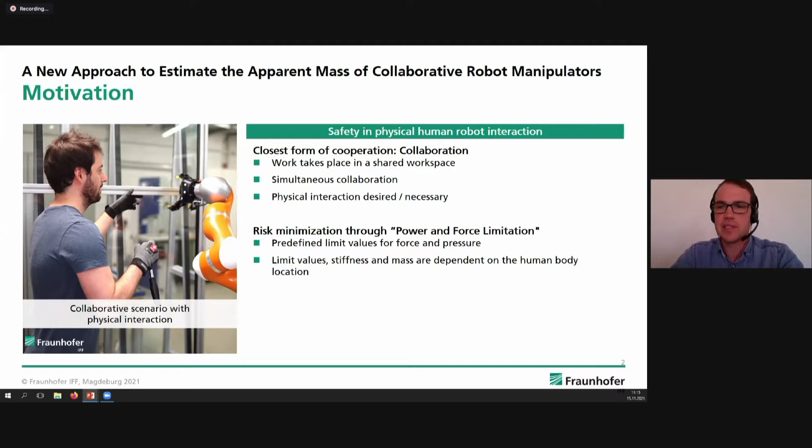That's why robots working in this mode must be run in the power and force limitation mode. In this mode, there are predefined limit values for force and pressure for each body part of the human. As a result, today you have to do experimental validation with a biofidelic measurement device at the end of your installation of the robotic system, and this device emulates the stiffness behavior of the human soft tissue.

But what does this mean? So if you want to set up a robotic collaborative work cell, you will start with your virtual design tool. There you will define a default velocity, calculate your cycle time and everything based on that. And next, you will go into installation.

And in the installation, you do tests. And those collision measurement tests often reveal that the velocities you had in your virtual design tool don't meet those biofidelic limit values. So you have to go back in iterations, and this is very time consuming and cost intensive before you can go into usual operation.

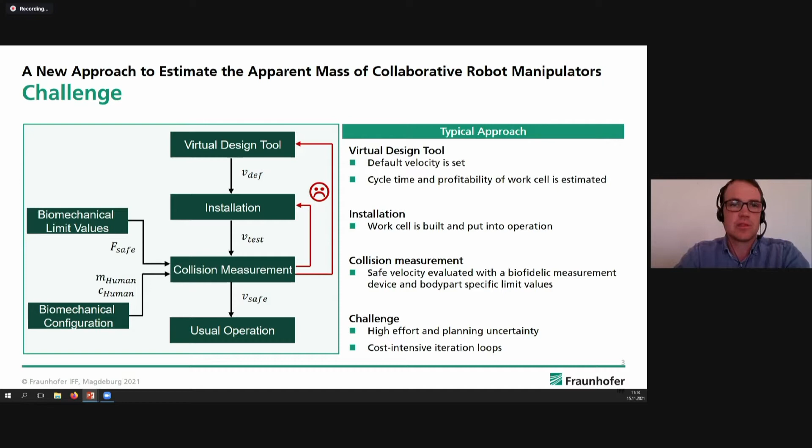So the big challenge is that those loops, you usually don't want. That's why we say, okay, the best way would be if you could already calculate somehow a safe velocity inside your virtual design tool. Because like this, you can go directly into installation of the robotic work cell with your safe velocity, and finally go to usual operation, skipping this time-consuming experimental validation.

And the question we had on this topic was: is the apparent mass suited to predict the safe velocity, and how must this apparent mass be calculated?

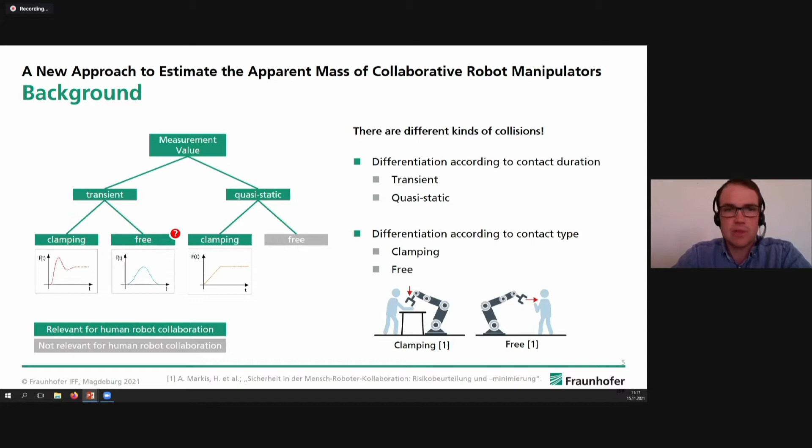To understand what kind of collisions exist, we have to look at a little bit of background. There are different kinds of collisions: we have to differ between the time constraint, so it could be transient, meaning a short collision, or quasi-static, meaning long term, and we have to differ between clamping and free collision. The work I'm going to present today focuses on free transient collisions.

In literature, we find different models to calculate the impact force. The most simple model says that the mass of the robot collides with the mass of the human. In between is a spring, and we can reduce the system to the one on the right, where we only have one impact mass fixed to a rigid body via a spring, and we can calculate the impact force, or also the velocity if the maximum impact force is given.

So the question is: you have a multi-body system of a robot. How can you somehow project this to one directional point mass with the same velocity as the impact point?

To understand a little bit more, we have to look at how collaborative robots are usually built up, because they have elastic components in their drivetrain, mainly the torque sensor and the harmonic drive gear unit. As an effect, this elasticity decouples the drive and link inertia, so our single robot mass is at the end not one mass, but two masses.

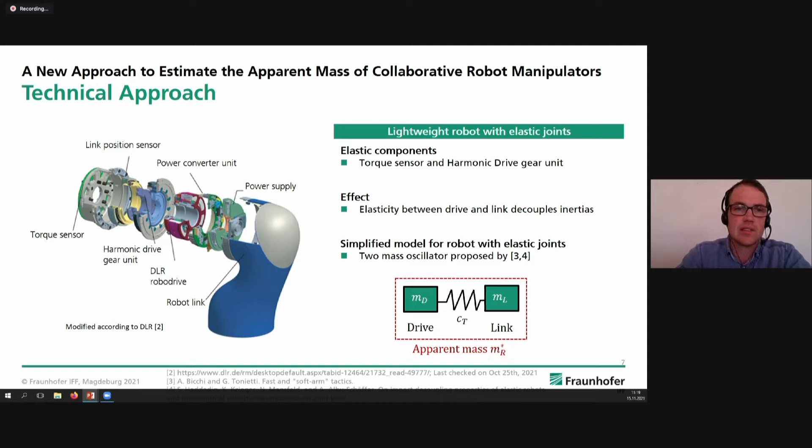This was already proposed by other publications. So we have a drive mass and a link mass, and in between there's the stiffness of the links. Next we have to parameterize this kind of model.

Khatib presented a model to project this point mass matrix M of a robot to a directional point mass. The interesting thing here is that you can calculate this mass with or without the inertia of the drive. The same thing you can do for the transmission stiffness.

Each joint has its own stiffness, and you can project this transmission stiffness also to the impact point, which finally leads to a model where we have the mass of the drive, which is the result from the calculation with joint drive inertia, and the mass of the link, which is the result without the drive inertia.

We can now look at this model where this robot with elastic joints collides with a human body, with soft tissue. We can formulate differential equations for each mass, and as a result, we can also solve those differential equations if we have specific assumptions.

For example, those assumptions are that you have linear springs, everything is at the initial position, and that drive and link move at an equal velocity at the beginning of the simulation.

Also, for those free transient collisions, we do not have to look at the effects of the controller, because those impacts are usually very short, and the controller has no chance to put any energy into this kind of collision.

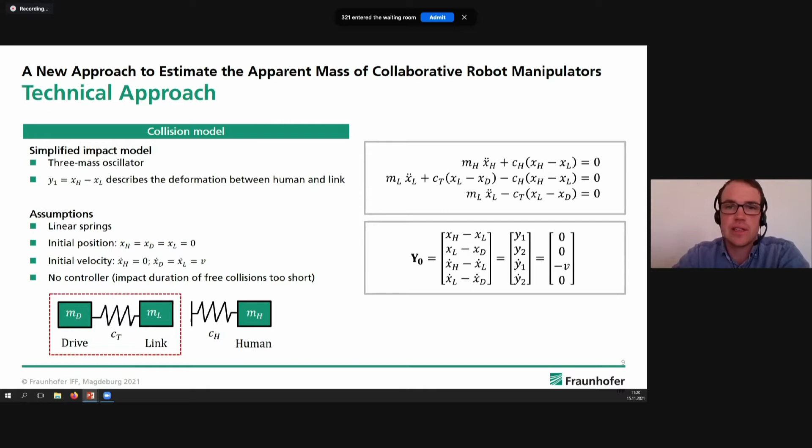So if we solve this for the deformation between human and robot, which is the interesting part because here the impact force occurs, we get y1 over time. As we can see, this function is a function of an oscillating shape formed by two sinusoidal terms multiplied with the velocity.

Based on this oscillating function, we can also calculate the maximum impact force, because this correlates with the maximum of this oscillating function. Finally, we can say we've calculated an impact force now for this oscillating function.

And if we go back to this very simple model where two masses collide, we can now ask the question: which mass did the robot have, or which mass of the robot was effective during the collision, so that we got this impact force. We have evaluated this for different situations.

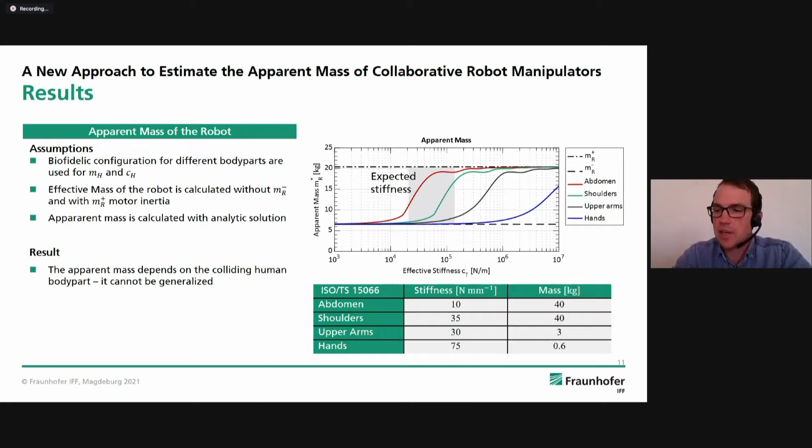So we built up the following experimental setup. We have, in this case, an EVA 14. This iiwa 14 is equipped with a force sensor and an impact tool.

The impact tool has a wave spring to simulate the contact stiffness of the human soft tissue, and this collides with a pendulum of different mass at different velocities.

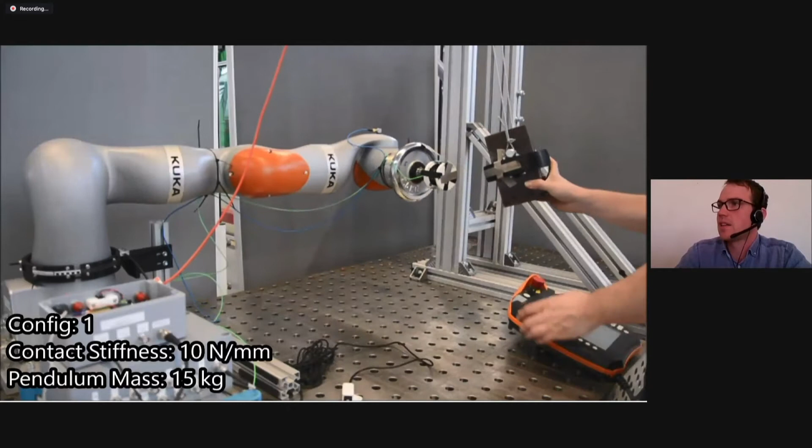Now you can see a quick video of how those experiments look. In this case, we have configuration 1 of the robot. It's a point-to-point movement colliding, and the robot collides with a pendulum of 15 kilogram.

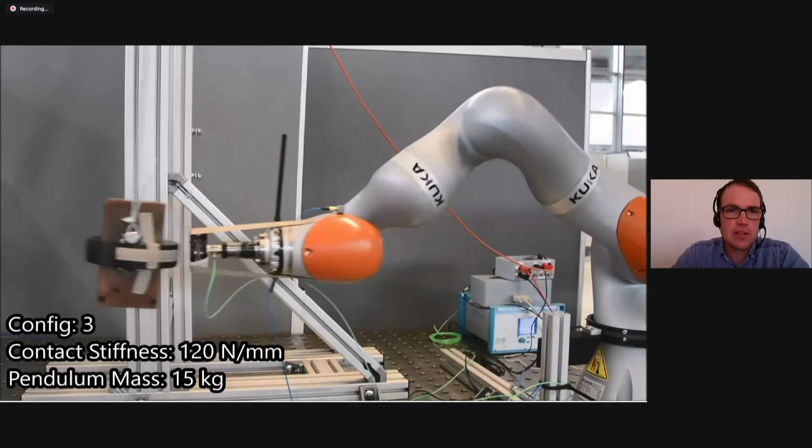Now the same video again in slow motion. In configuration 2, again a point-to-point movement in another joint configuration. We can see the robot colliding with a lighter body part of 4 kilogram or lighter pendulum. And in configuration 3, we have a linear movement with a very stiff spring of 120 Newton colliding with

the 15 kilogram pendulum. Next, we evaluated the experiments for the different robots we have used. So we have used an iiwa 14 and a UR10.

We have evaluated in each box, you can see here, the apparent mass over the different configurations. The configurations include different springs between 10 and 120 Newton per millimeter, and the two pendulum masses of 4 and 15 kilogram. The two horizontal lines in those graphs represent, again, the mass of the links only, and the total mass of links and drives is the upper line.

In red, we can see the simulation result, and in blue, the experimental results. The first thing we discovered in our experiments was that the apparent mass was independent of the impact velocity, which is great because this helps us estimate the safe velocity based on the apparent mass.

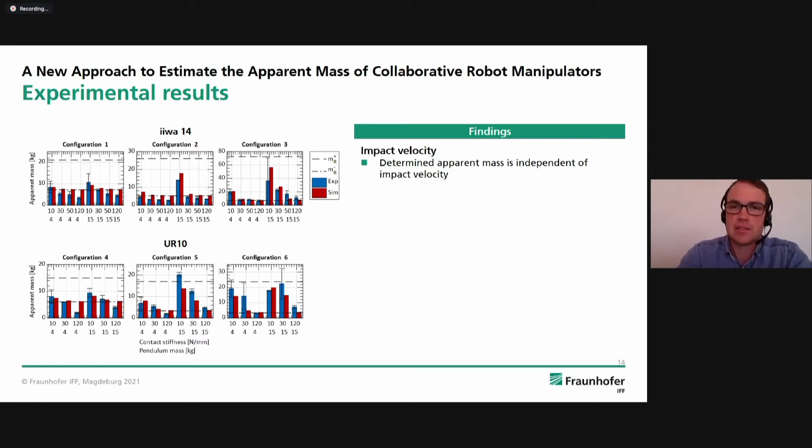Second, we saw, as already seen in the simulations, that the lower the contact stiffness, the higher the apparent mass of the robot. We also saw that a higher pendulum mass increases the apparent mass of the robot. And finally, we can also see that the predictions, the red and the blue bars, correlate quite well.

What's the conclusion of our work? The first research question was whether the apparent mass is independent of the impact velocity and is therefore suited to estimate the safe velocity. And it's a clear yes.

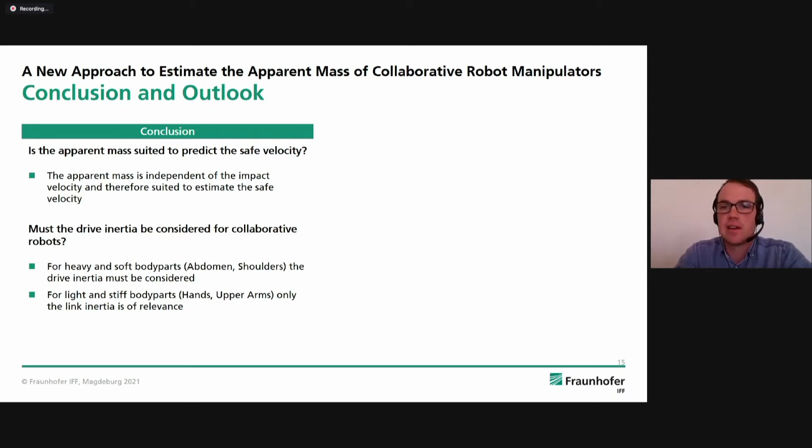But a second question makes it a little more complicated, because we discovered that the apparent mass cannot be generalized, but must be given dependent on the human body part. And this makes it more complicated than we thought at the beginning.

So what's the proposed solution? We think it could also be a solution to use this analytic solution we have provided, so you can directly calculate the maximum of this oscillating function. And if you then know the maximum impact force or maximum impact energy, you can directly calculate the safe velocity.

So what's the outlook of our research? We of course want to look at nonlinear effects, because you could imagine that especially human soft tissue is not linear. We want to see how it's easier to parameterize this model, because often things like joint stiffness and drive inertia are not given by the manufacturers. And last but not least, we also want to close the gap by finding a model for clamping situations.

So in this second paper, I'm going to talk about a new conversion method to evaluate the hazard potential of collaborative robots in free collisions. The research of this project was funded by the Rossini project, which we're a partner of. The Rossini project is a European project called Robot Enhanced Sensing, Intelligence and Actuation to Improve Job Quality in Manufacturing.

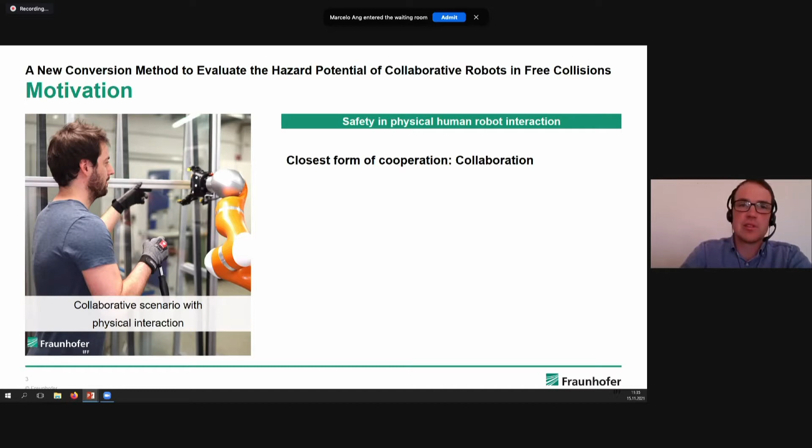So again, we are basically talking about the same motivation as in the first topic, so I will keep this a little bit shorter. We have again collaboration, we have to do power and force limitation, and we are focusing in this topic now on the experimental validation with this biofidelic measurement device.

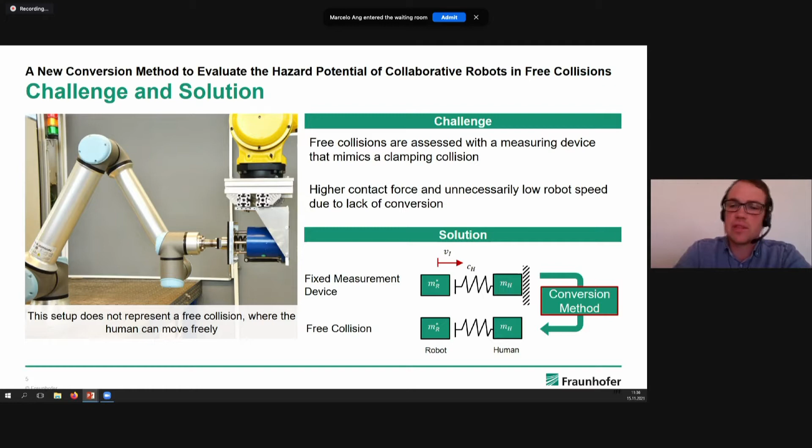So it means at the end, your robot moves at a much lower speed than it could, and this is of course a high loss of productivity. So we ask a question: if it's somehow possible to convert these measurement values of the fixed measurement device, with a conversion method, into a free collision.

In this case, we developed a mechanical model. On the left side, you have the same model of the robot like in the previous topic, so a robot with elastic joints and moving masses. On the right side, you have the biofidelic measurement device. This device consists of a damper material, a bumper, a spring, and underneath the spring is a force sensor, which measures the force over time.

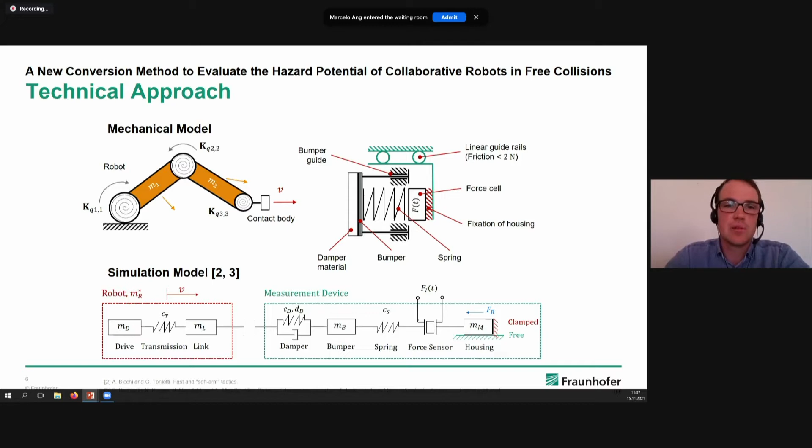In case you have a fixed measurement device, this force sensor is fixed to a rigid frame. In case you have a free measurement device, it's attached to linear guide rails. You can simulate this as a one-dimensional system as shown on the bottom: the robot with drive inertia, transmission stiffness, link inertia, and on the other hand the measurement device with all the springs and masses.

If we further simplify the system, we can say the fixed device is just a robot colliding with a spring, and in case of the free device, you have the robot colliding with the total mass of the measurement device. In this simplified or abstracted system, you can calculate the impact force analytically, directly. And if you build a quotient between the two, you can see that it's possible to calculate the free impact force based on the masses of human and robot.

But of course this means you have to know both of them. So the mass of the robot in this clamping situation, you can calculate from the momentum of the impact force. As you can see on the lower graph, you have the force over time signal, and you can build the exact integral for the momentum, or you can even do a triangle approximation. From this, you get, for every specific velocity and every specific joint configuration, the mass of the robot.

On the other hand, you have the colliding mass of the human. Within these experiments, the colliding mass of the human is just the mass of the measurement device itself. In case of a real scenario, you would get those values from the ISO TS 15066.

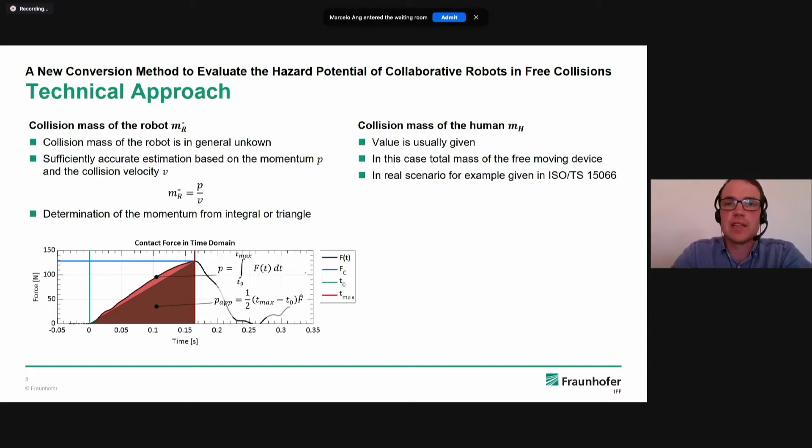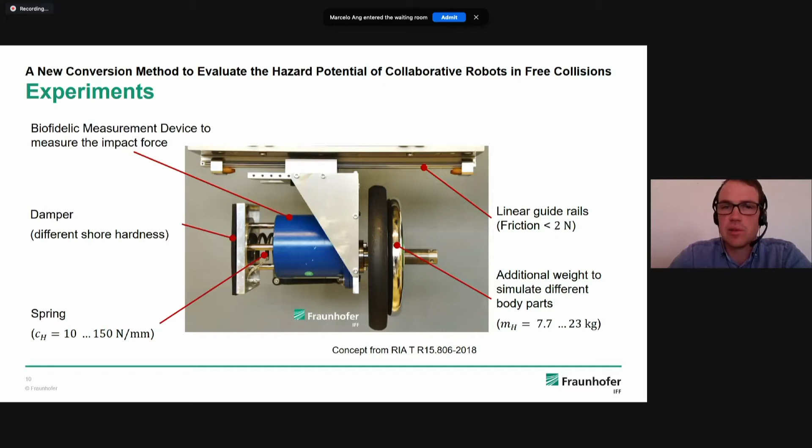So in total, we have seen that from the simulation side, it should be possible to have this conversion method working. In the next step, we want to see if that can also be seen in practical experiments. For that reason, we attached this biofidelic measurement device to a linear guide rail, and we added the possibility to add additional weight to simulate different, heavier body parts of the human.

We have repeated those experiments with in total 3 different kinds of robot with various payloads. For every payload and configuration, we created the following graph showing impact force over velocity. Just as predicted by the simulations, the fixed measurement device in green has the highest impact force, followed by the 23 kilogram and 7 kilogram measurement devices. For the lightest measurement device, the admissible velocity can almost be doubled, so you can go at about 640 millimeters per second without injuring or harming the human.

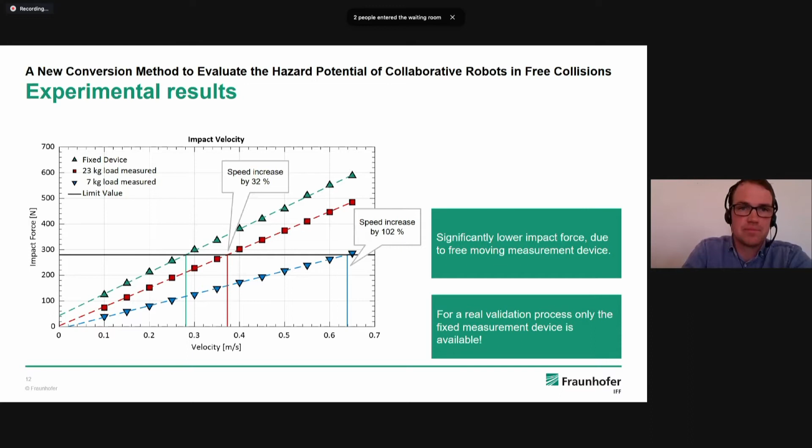Next, we applied the conversion method. This means you only have the results of the fixed measurement values available. From that we get the maximum impact force, the effective mass of the robot, and the mass of the human, which in this case is the mass of the free moving measurement device. From that we calculate the maximum impact force of a free impact. The result are those lines in red and blue, and as we can see, we get almost the same speed increase as we saw in the experiments with the real free moving measurement device. This looks already quite good.

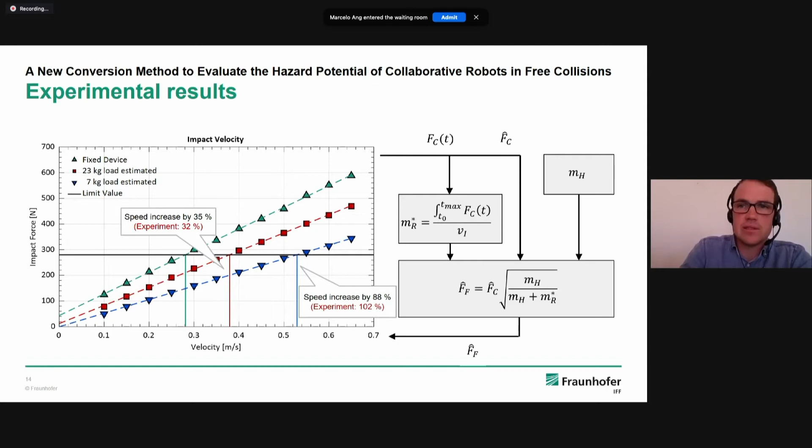For that reason, in the next step we looked at all measurements we had done to see how accurate this conversion method is. In total we had about 1,000 collisions of a free moving measurement device, and the same amount of measurements for the fixed device, and converted all those results with the conversion method, comparing it to the maximum impact force of the real experimental results.

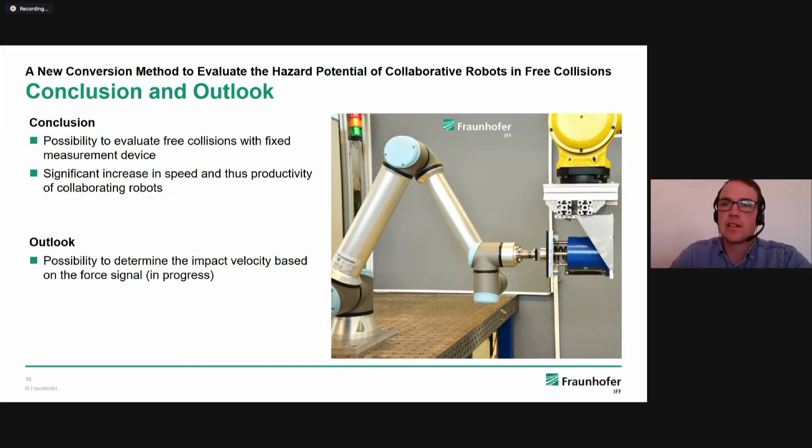So thank you very much for the opportunity to present the second topic, and I'm now happy to answer your questions.

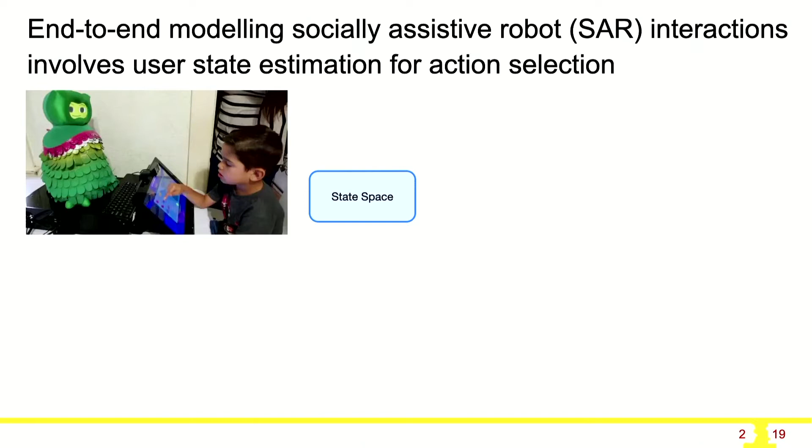Our robot tutor situations typically look like this: we have a robot and a student sitting at a tablet working with the robot. How I like to frame these robot tutor setups is we have some sort of state space: the robot, the user, and the interaction. The interaction would be the tablet, the games, that sort of thing. And then just some examples, the robot's doing some sort of action.

The interaction has some current exercise. One interesting thing to note is we do some user state, affective or cognitive, estimation—something like user engagement or their concept understanding. Then we have the action space, both the robot and the interaction.

The robot can do certain things, and the interaction can move, exercise, stuff like that. In the robot tutor world, you'll see a lot of work model this as one big action space, saying the robot is moving the interaction forward. And then the end goal is to find some mapping.

Today I'll be focusing on this user affective or cognitive state—how can we expand that state space? The classic example in the education world is modeling student engagement. Engagement, and I'll be using the word curiosity later, is just a high-level psychology term. They're all super context-specific and mean something completely different across papers, so I'll try to keep mine very specific when I talk about curiosity later.

But engagement in this context would be modeling some logistic curve—you see how long a student is taking to respond to questions. If a student's taking a very short time, they're probably disengaged. If this happens over a long period of time, the robot should probably engage in some re-engagement strategy.

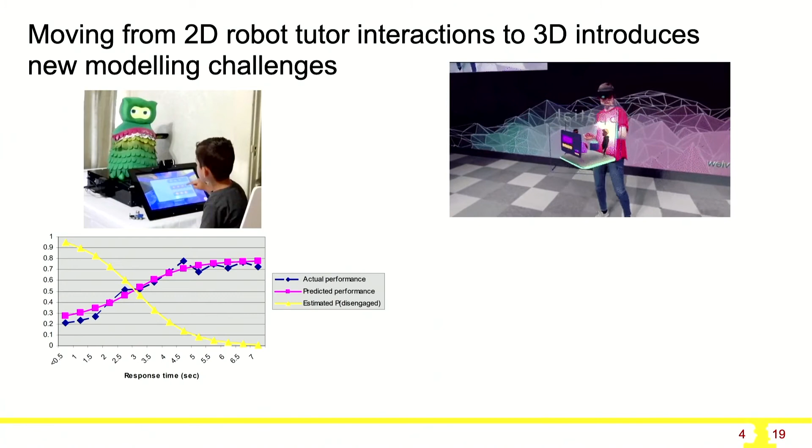So we wanted to get students out of their seats and move from a 2D space to a 3D space. So we looked at augmented reality—here's a GIF of the HoloLens 2. Augmented reality is where you can see virtual objects projected in a 3D space, and those objects can interact with the world. You can have a virtual ball that bounces and rolls around, but you can still see the world around you. That was really important to us.

In order to explore this, we created a 3D Scratch, or 3D block-based programming language, eventually to be used with 4th and 5th grade students, who did exercises alongside a robot tutor.

The key insight from this work: first, we propose and evaluate a personalized multimodal measure of student kinesthetic curiosity, which combines student movement and curiosity scores. Then, something I think is a bit more important, we did a within-subjects pilot that supports further exploring unique multimodal user data afforded by augmented reality interfaces.

Basically, in our normal interactions, we have external cameras pointed at a student, and if the student moves five feet over, all your tracking stops working. What's great about AR interfaces, such as headsets or even phones, is that the device is worn or held by the person, so it's a lot more consistent.

So, like I said, we developed Move to Code. Here is a Hello World example, the canonical computer science example, and some other things we've implemented—students can drag blocks around and do math. More recently, we've added for loops, arrays, the ability to visualize memory and variables, and even control the robot.

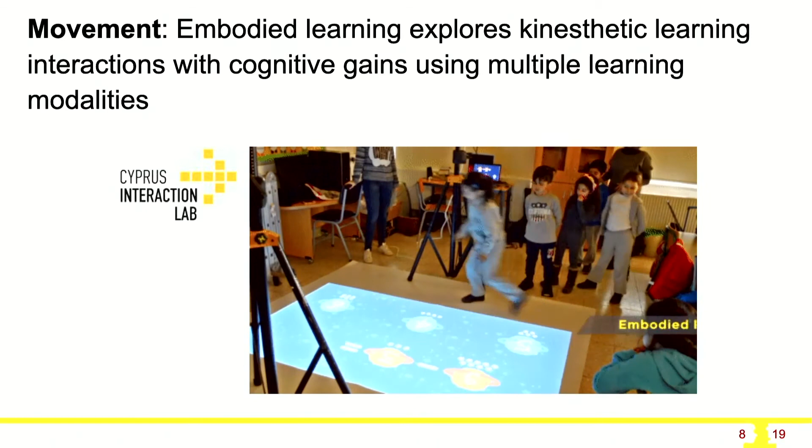In the embodied learning world, there are kind of two axes: how much the student moves, and how integrated the learning is. That jumping example would be high movement but low integration, whereas another experiment has people connect arms to make angles, which is very integrated into the learning itself—an interesting psychological view on it. So for curiosity, this is measured all over the place in different ways in human-robot interaction.

One example is out of Curiosity Lab. They had a robot do poses and then had the person do different poses, and then they can quantify how much variance they have in their posing.

A more classical approach, which is what we ended up taking, is out of Waterloo, where they have some sort of topic, in this case, rocks. How many questions is a student asking about rocks? Are they still wondering about it later? And how many things are they interacting with?

So in Move to Code, what we did is we created a movement score and curiosity score, which are sliding windows. The application runs at 50 hertz, so grabbing a score of 0.02 seconds doesn't give you very much. We take the head pose over time, over about 20 seconds, and that will be your movement score.

And then we take your curiosity score as how many information-seeking actions you've done in the last 20 seconds. An information-seeking action is super context-specific. Back then, this is 2 years ago, this was defined as basically any time someone grabs something or moves something around. So we had these two scores, great.

They have different units. We wanted to combine them and personalize them to each student, so we thought about z-normalization. You take the student's average and variance, iterate that over time for both scores, and then normalize it out. Then we can add those together and assign weights based upon which one we care about, and that gives you a real-time score for students' kinesthetic curiosity.

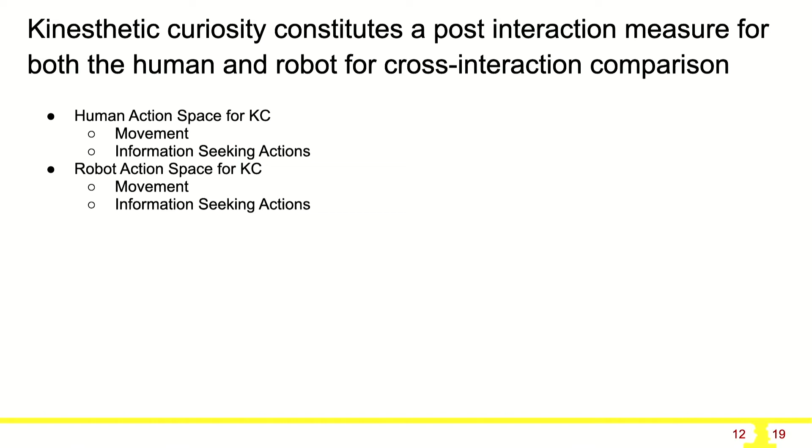Another great thing about this is if we want to compare the human to the robot, their action spaces for this score are the exact same thing: how much the person is moving, how much the robot is moving, and how many things each of those individual things is moving or doing. This is a problem in HRI where we say we have a more curious robot or a less curious robot. What's great is now we can actually compare how curious our different robots are in different interactions.

So we did a pilot study. We ended up with 9 participants - we had 10, and then one had to drop out - for 20 minutes, within subjects. We had a more curious robot and a less curious robot. I had these thresholds, and I'll show the large mapping here of what those thresholds actually mean, but really all you need to focus on is this: virtual information-seeking action versus positive physical affect.

Based upon the thresholds, we would do a virtual information-seeking action, otherwise known as just a curious action by the robot, such as doing something in the interaction or trying to ask the student to do something. If it's above the threshold, we just did some generic positive physical affect. And then we had a time since last action, so the robot's not just spamming actions over time.

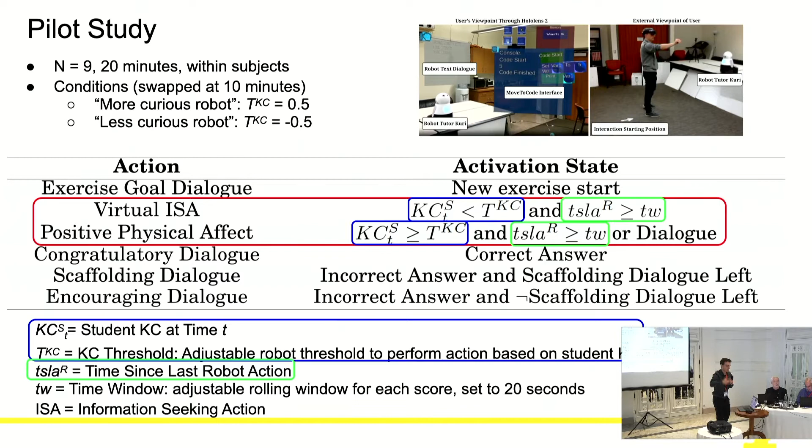So the first hypothesis was really about KC depending on stationary mean and stationary variance. We tested that for all the participants and found that it holds true for all of them.

We did find that there was an effect. I would argue it's not super strong. So technically, we do see a short-term effect when the robot would do these things, but you can ask me another time as to what I think that effect is actually from.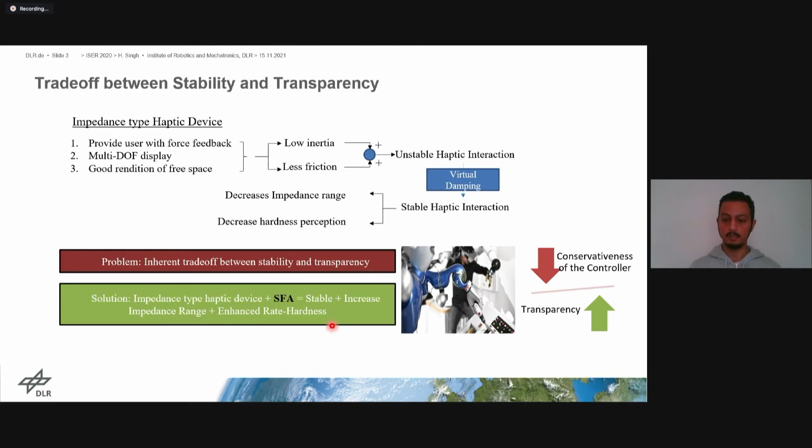If we look at the virtual environment rendered as a simple spring setup, on the left we have force versus position of the haptic interaction point, the dot in black, and on the right we have energy versus position. As the haptic interaction point moves inside the virtual environment -- the human operator trying to interact with it, called the pressing path -- as the penetration depth increases, so does the force, and so does the energy into the system. However, when we move the point back out of the system, called the releasing path, the energy goes into the negative domain. So it's no longer passive, the system becomes active. This is the energy we need to eliminate from the system to make it passive and therefore stable.

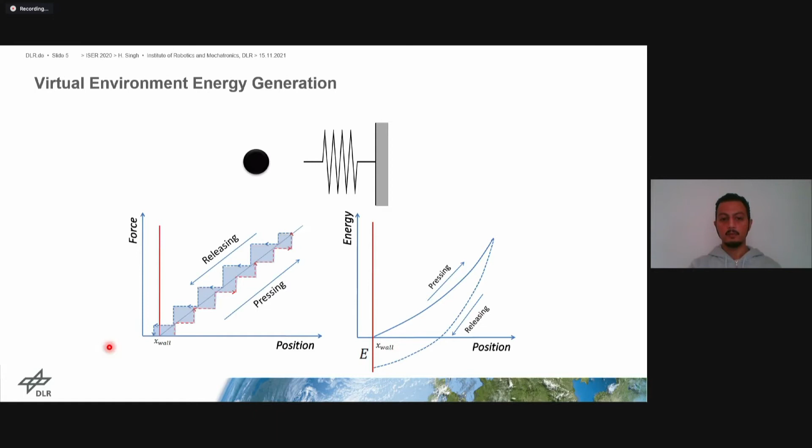That is the unwanted energy generated in a system because of the effects of discretization. This is a real experiment using a Phantom Premium. For a very small stiffness, shown as force versus position on top, the interaction is stable -- it does not diverge and converges at some point. The stiffness here was 0.5. Using the same Phantom Premium 1.5 device, we see at the bottom that the interaction goes completely unstable and diverges when the stiffness is higher than what it could stabilize.

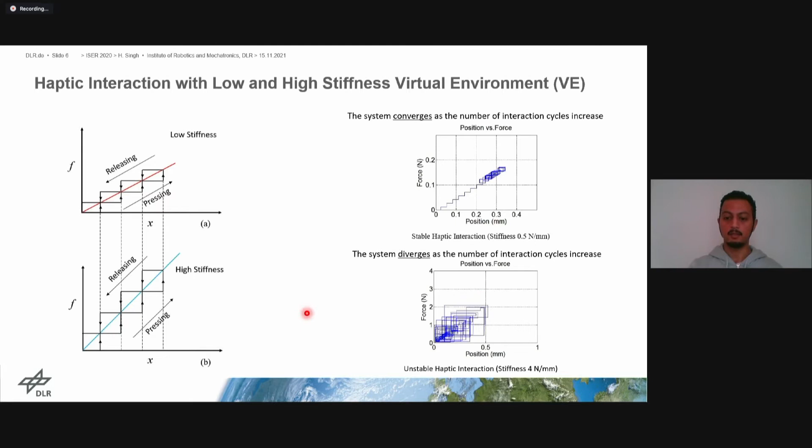In the past there were many stability-based approaches proposed. They were passivity-based, then a little less conservative absolute stability-based approaches, and then even less conservative input-to-state stability approaches. Going back to what successive force augmentation actually proposes, and then we'll come to what we have proposed for this paper.

What SFA proposes is: let's say we have a really high stiffness of the virtual environment that we want to attain. We start with a very small stiffness based on Colgate's passivity theorem, which says it should be less than 2B, where B is the physical damping of the actual device we are interacting with, divided by the sampling time. So we have this very nice small stiffness. If we always follow this, the system would be stable with no instability issues, and the releasing path again follows the same stiffness value. If you stick with this value, you always diverge or always converge somewhere at this point.

You would never be able to reach up to the desired stiffness value. So what we do is introduce an offset, a feed forward term. What it does is that in the next interaction cycle, rather than following this line here, we follow the line on top of it.

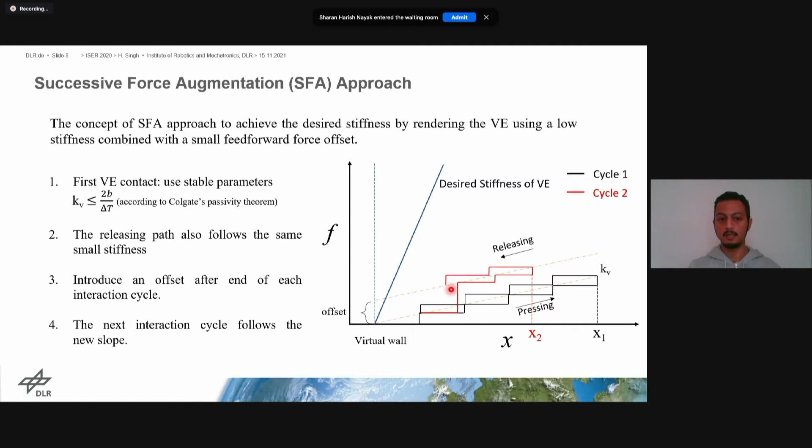So we parameterize it accordingly, and then the system is stable. As we continue these iterations, adding this offset based on some value alpha, we see that the graph on the right keeps moving further and further up. We started from a very low point, and then we reach a higher point here. So if we keep on these cycles, interacting with the environment and not moving out of it, we would also reach the desired point that we have to reach, which we'll show in some plots here.

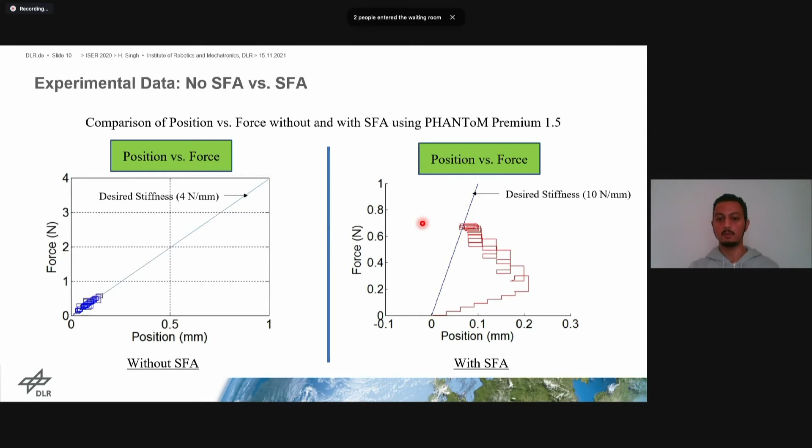We see the stiffness is pretty high on the right, not so high on the left. On the left, we don't have any controller, and the system diverges and goes unstable. Whereas on the right, with the same experimental setup, phantom premium 1.5, even with a very high stiffness, we see that it starts from a very low value but reaches up to the actual desired stiffness, which was 10. That is what we wanted to attain.

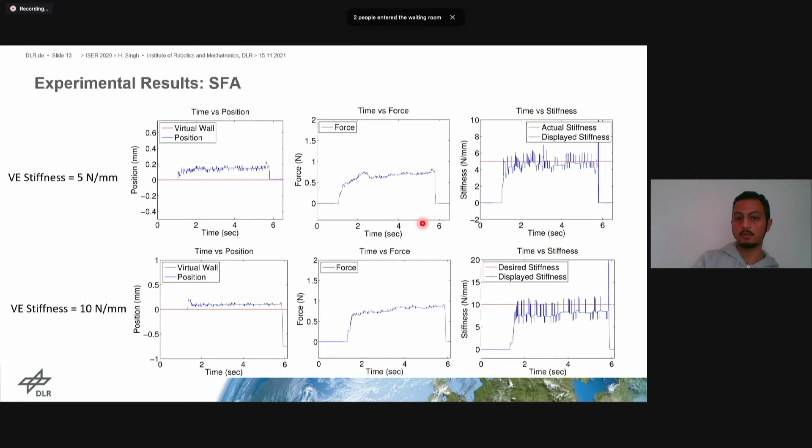This is the same data we saw, but also with position and force information. One of the drawbacks of this is rate hardness. Even though the displayed stiffness is higher, it gets higher with time. But when you make contact with the environment, the user cannot discriminate if the environment is crisp or something very soft at the moment of contact.

Rate hardness is the rate of change of force over the rate of change of velocity during the initial contact of the haptic interaction. What we do is, during the initial contact, you follow the real high stiffness of the virtual environment. So no matter if the stiffness is 5 Newton per millimeter or 10, you follow that straight away. On the releasing path, you follow the smaller stiffness instead of the higher stiffness.

One drawback of this is that when you're following the small stiffness on the way back, once you exit the virtual environment, shown here by the dotted line on the graph above, you might just fall down and the force might become zero. This force discontinuity would feel even more absurd if the stiffness of the environment is higher. So if we look at the previous graph, the stiffness was smaller and the force drop wasn't that high, but here we'd have an even higher force drop, which is not what we want.

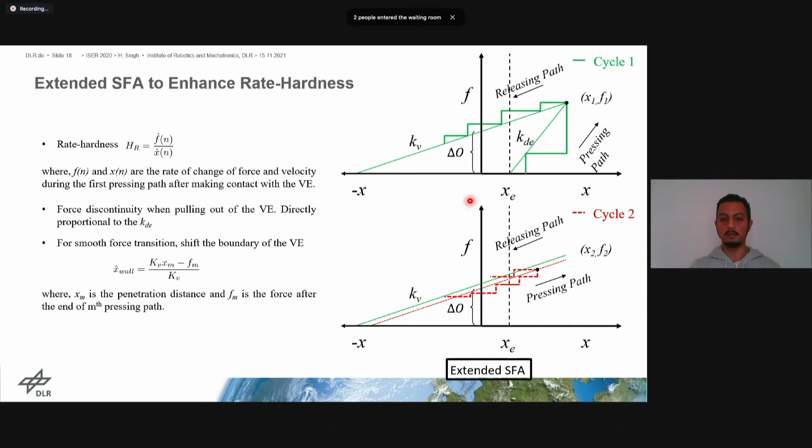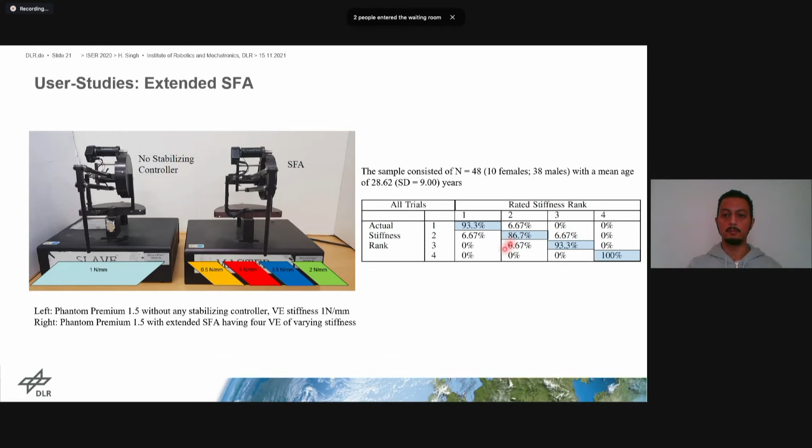So when we used this approach, we conducted some user studies where we had 2 haptic devices, on the left and the right, both Phantom Premiums. On the left we had no controller, and on the right we had an SFA controller with different virtual environments. The environments were randomly arranged, and when users interacted with them, they could accurately discriminate between them. So a significant difference could be clearly seen from these experiments.

However, another drawback, even with the extended SFA version, was the energy generated. It was not stable for all haptic interactions. For example, if you had a really lightweight device, you could not always render very high stiffnesses with it, because that would lead to high energy generation and instability. To counter that, instead of using the same small stiffness from the point where the releasing path starts, we make contact with the very high stiffness, but the first pressing path of the interaction cycle follows this smaller stiffness. As a result, the generated energy during the first cycle is much less compared to the one on the left.

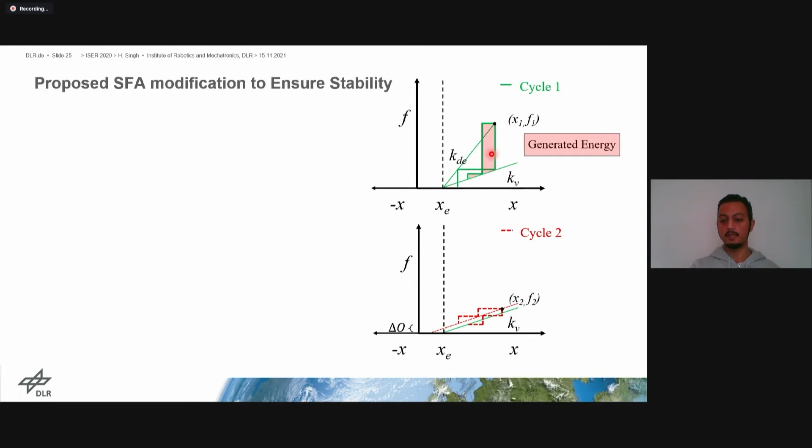We followed this algorithm: for the first interaction cycle, follow the high stiffness, and for the next releasing and pressing path of the consecutive pressing cycles, we use the same small stiffness, KV, which was proposed by Colgate.

However, we still wanted to be sure that the system would remain passive. With the SFA plus virtual environment, although we cannot conclusively say it was passive, we had to introduce a passivity observer and a passivity controller, and the output force would then be modified such that the overall system is passive and therefore stable.

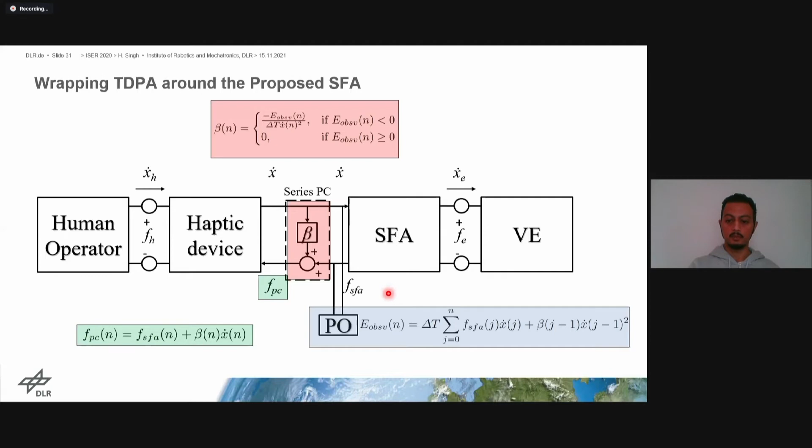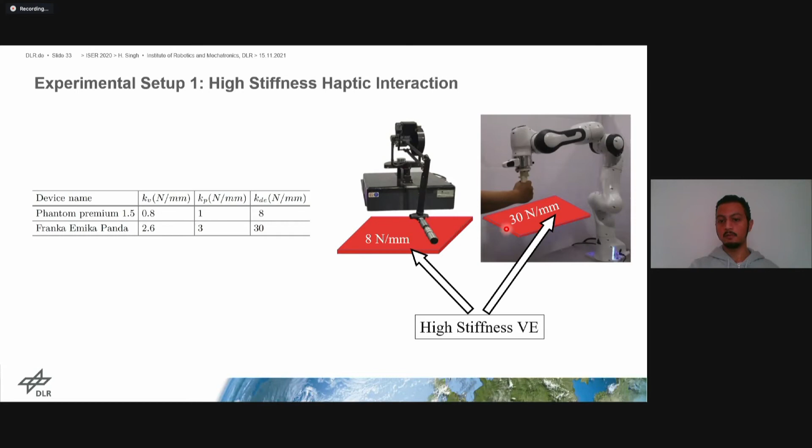The experimental setup used to test this controller involved the Panda and the Phantom Premium. The Phantom Premium was used as the haptic device, and the Panda was the remote robot that interacted with the environment. For the first set of experiments, we used the Phantom Premium and the Panda to interact with a virtual environment: 8 Newton per millimeter for the Phantom, and 30 Newton per millimeter for the Panda, which would have been unstable without this controller.

Just to show you what the experiments were like: we wanted the user to feel the same sensation as if making contact with a very hard environment. Now if you move the environment, by using the device you should still be able to feel something very rigid, not something soft.

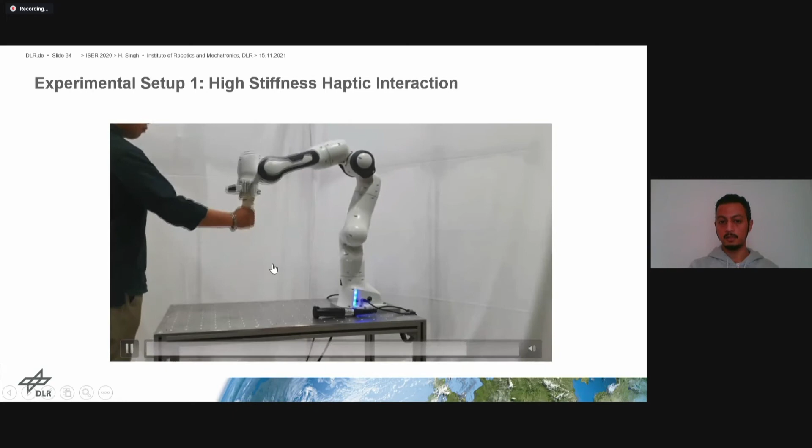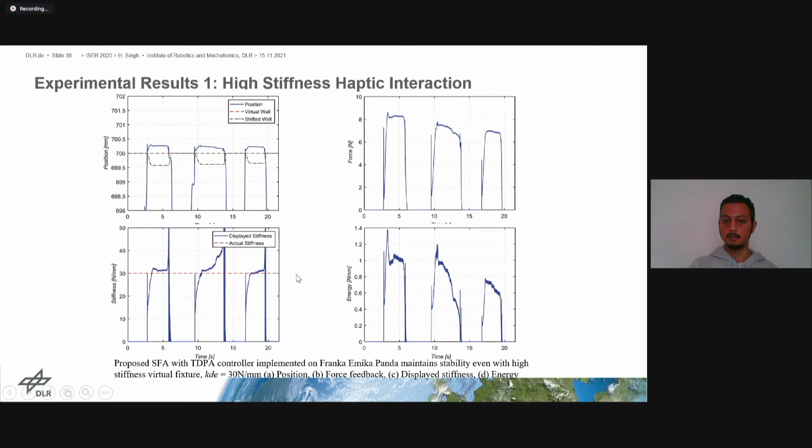So these were the experimental results we had. If we use the Phantom Premium in the first case, we had a stiffness of 8 and it could stably render that without going unstable. The next one is for the Panda, which we saw in the video in the last slide, where we could render stiffnesses as high as 30 Newton per millimeter, still being stable. The user actually felt as if he was interacting with something really hard, not something soft.

The last set of experiments we did was in the teleoperation scenario, where we had a virtual fixture, seen as the blue translucent box here on the right, and these experiments were carried out without any delay between them — it was a delayless experiment.

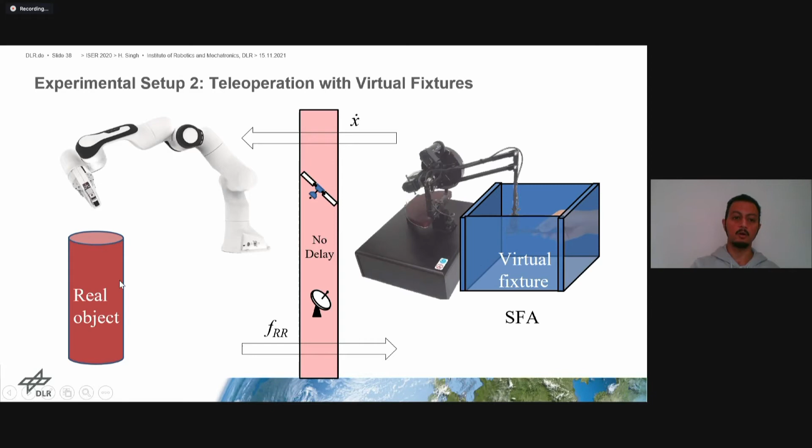Just to give an idea of what the experiments were like: so the user, if you see on the right, there is some unseen virtual fixture that the user can interact with.

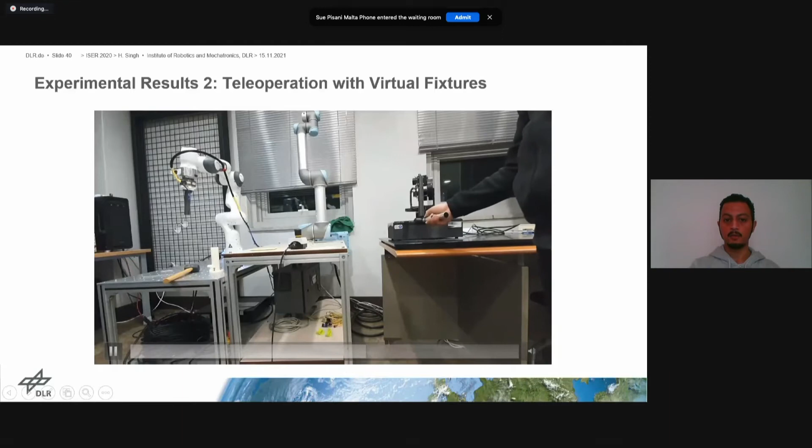However, there is no object in the real environment, but the user can discriminate between that and this, where he actually has a virtual fixture that he can feel. So he cannot move the device anywhere outside of that boundary, the virtual boundary that he has. And he can also make contact with the real environment.

He was able to tell the difference, whether he was touching the real environment or the virtual fixtures. This could be very beneficial in the medical domain, where if a surgeon is performing surgery and there are virtual fixtures, he should know if he's actually touching the organs inside the body, or if he's in a safe zone, or going out of the safe boundary which he should not, for safety reasons.

So these were the experiments. As you can see, the blue line on the right is with the virtual fixture. You can clearly see a very high stiffness with the same device. And the one on the left is the displayed stiffness for the teleoperation task.

To conclude, we propose some modification of the SFA that generates less energy but still maintains the rate hardness properties. It was combined with the time domain passivity approach to ensure passivity of the overall setup. We use the experimental setup to render very high stiffnesses for haptic rendering, and also for teleoperation experiments where the user had to discriminate between the force feedback coming from the real environment versus the force feedback coming from a virtual environment.

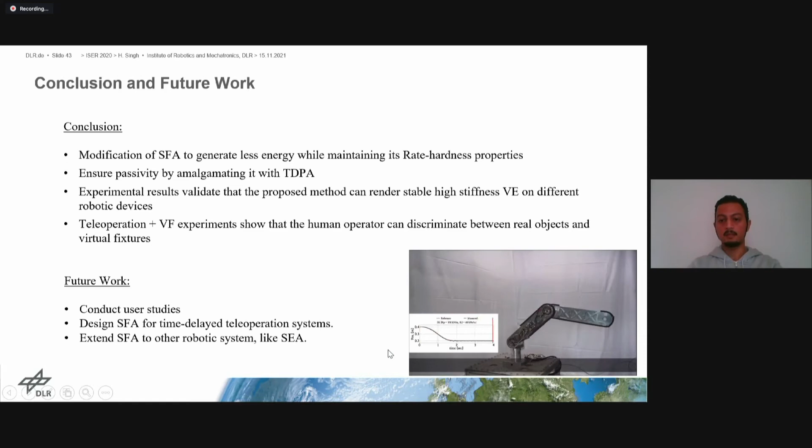For future work, we could conduct conclusive user studies to find out if users can actually discriminate that, design the SFA for time delay teleoperation systems without using TDPA and just using SFA, and also extend it to other robotic systems like series elastic actuators that we tried a little bit. We saw we could also implement that on series elastic actuators, which makes the system behave much faster, increasing the bandwidth or dynamic bandwidth of the system.

So thank you very much for your attention, and I would be happy to answer any questions if there's time. Thanks. Thank you. Thank you.

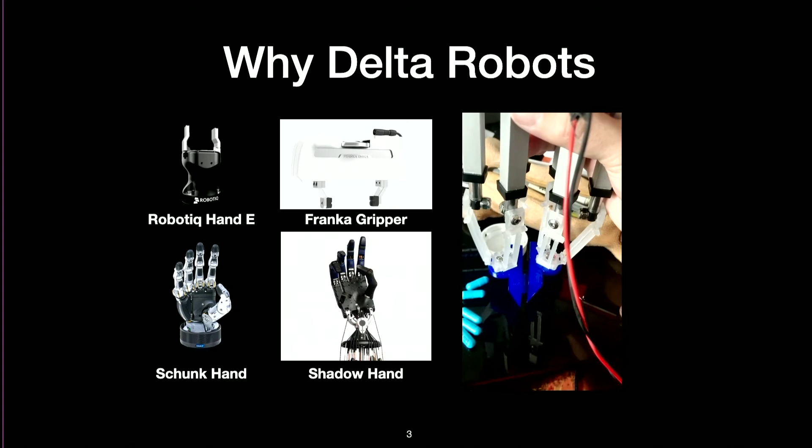However, they're a bit large at the moment. So our goal was to make 3D printable robotic arms that have higher degrees of freedom than these typical 1 degree of freedom open-close grippers, but at a cheaper price as compared to these much higher degree of freedom hands like the Schunk hand and the Shadow hand. Here's just a demonstration of it picking up a pill, but mainly we want it to also be soft and compliant so that we can interact with humans better.

So if a human was being fed a pill, it would be much safer to do so. So some related works are first the Millidelta. This one was a millimeter scale delta, but it relied on MEMS manufacturing, so micro electromechanical systems. It's very difficult to manufacture because it's very intensive, but it was actuated using piezoelectric actuators. On the other hand, there's this Delta Robot 1.

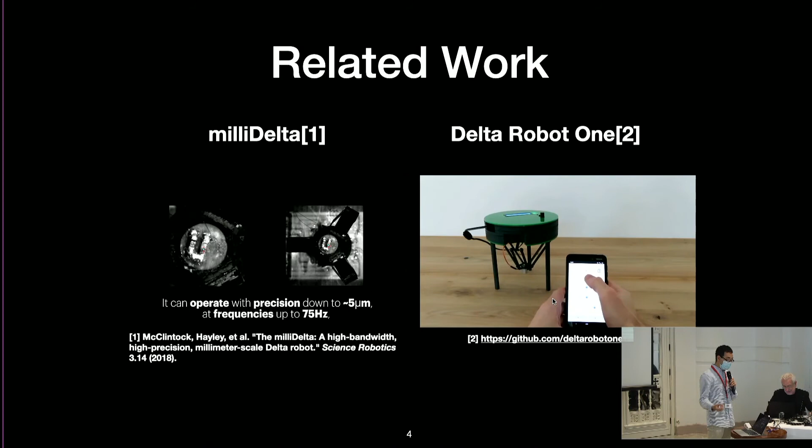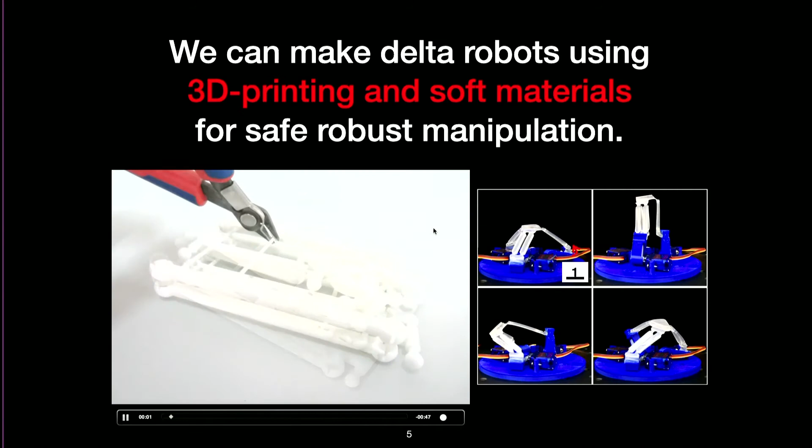This one's like an open source kind of Delta robot, but it relies on these ball and socket joints. These ball and socket joints require manufacturing - you have to print it, like pour plastic into a mold to make the balls better. Ours are all 3D printable, so here you can just print it flat using either the materials PP or TPU.

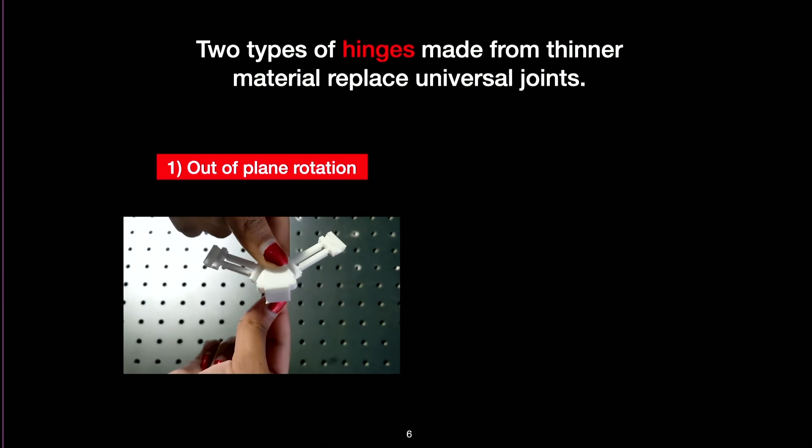To replace the ball joint on typical universal joints, we have two hinges. One hinge goes down while the other goes side to side. The goal of this paper was to discover the parameters that best allow these motions so that the end effector stays parallel to the base.

We tested two different materials: thermoplastic polyurethane, TPU, which is the blue one, and polypropylene, which is the clear transparent white one. They have different properties—TPU is typically softer than polypropylene.

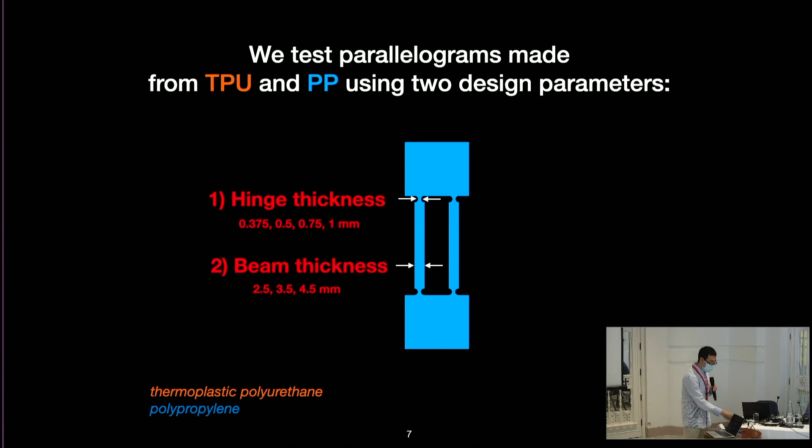We varied the hinge thicknesses from 0.375 millimeters to 1 millimeter. 0.375 millimeters was about the thinnest that it could print reliably while still being strong enough. For the beam thicknesses, we varied it from 2.5, 3.5, to 4.5 millimeters. The total length of the beam was constant at 27 millimeters, the depth was 4 millimeters, and the hinge length was 2 millimeters.

We did some parallelogram characterization experiments. We mounted these parallelograms onto a board and used OptiTrack to track the rotation. We had a force sensor attached to a linear actuator that pushed the tail of the parallelogram to see how much force it would push back on. In total, we executed 120 of these experiments.

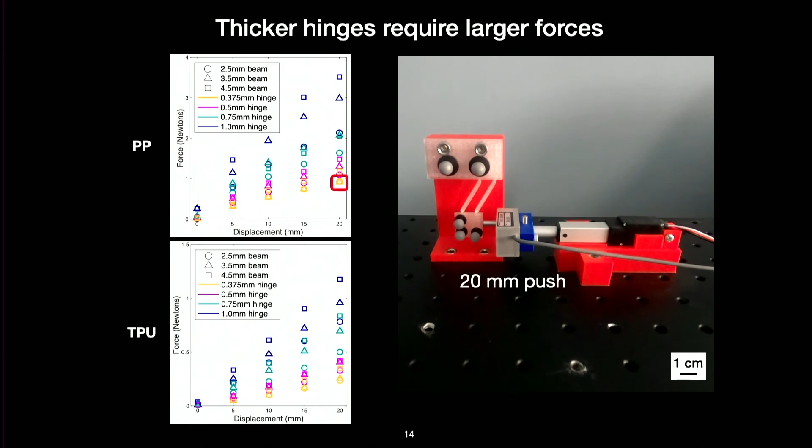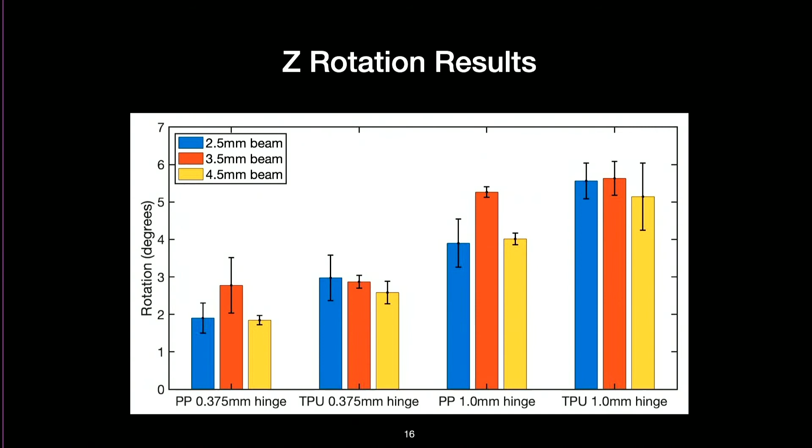Next, we used the OptiTrack markers to figure out the rotation. The least amount of rotation is most ideal, so it stays a parallelogram. We found that again, thinner hinges resulted in the least rotation. Thicker hinges pushed back more, but that also meant they typically rotated more. The z-axis is coming out of the frame, so using OptiTrack you can see the rotation. All of these experiments were done with a 20 millimeter push.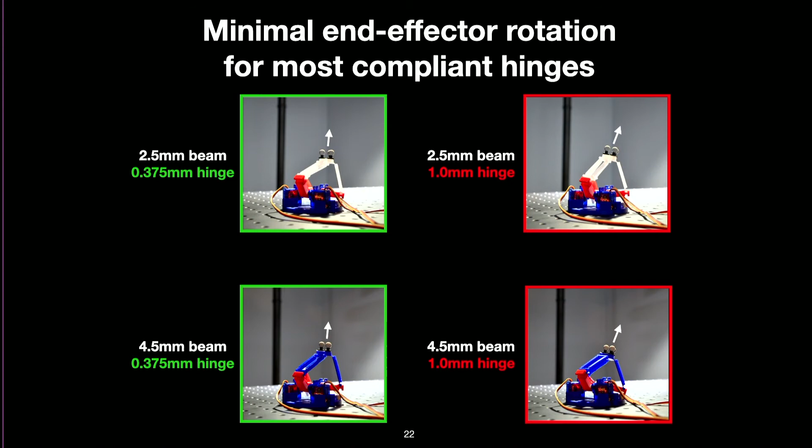Here I'm showing all the different experiments, but the end result was that the most ideal parameters for both the polypropylene and TPU deltas was a 0.375 millimeter hinge. The difference was that TPU, because it was softer, performed better with a 4.5 millimeter beam thickness, while polypropylene was fine with 2.5 millimeters. The 1 millimeter hinges resulted in the worst results. In conclusion, we found that the more compliant hinges performed better, and polypropylene parallelograms had more minimal Z rotations and larger forces.

Now this is laying the groundwork. I'll briefly talk about some following work we presented at RSS this year—I was a co-first author on this. We created this linear delta using the ideal parameters found in this paper, and with these we were able to show that it was compliant.

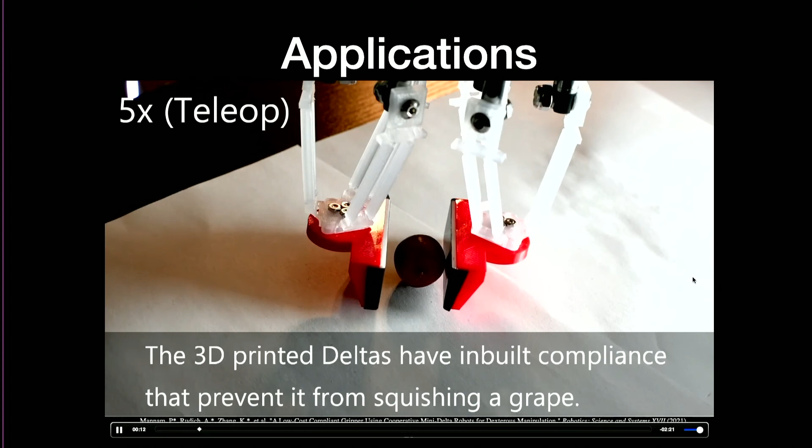This is me trying to squeeze a grape—it couldn't be squeezed very much. Oops, did it go backwards? Oops, sorry.

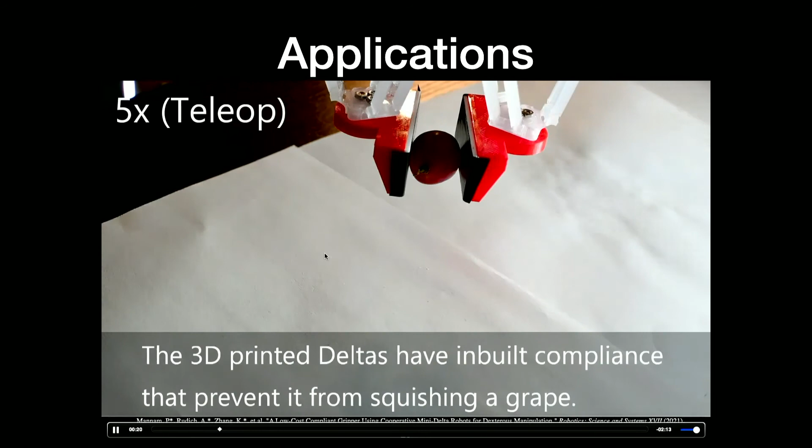So it's compliant in that it won't squeeze a grape, but because it has 3 degrees of freedom per finger, it gives us a lot more options to move, tilt an object, or roll items. Here it's aligning a stack of quarters—it can pick up a quarter by itself.

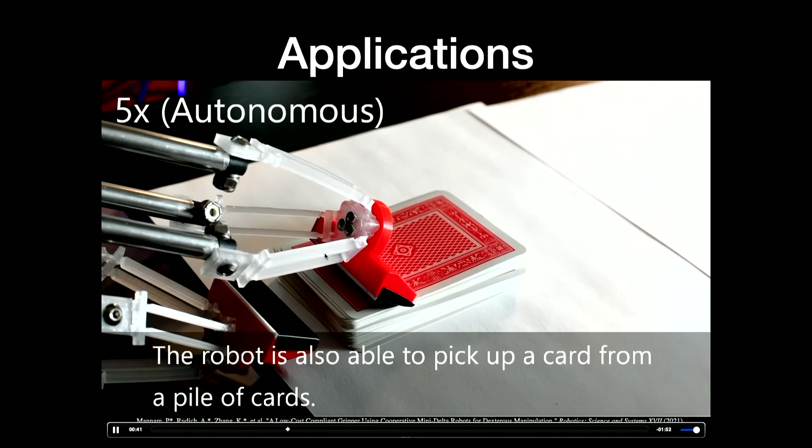The total cost of this end effector was about $350 US, and we have all the CAD designs and 3D print STL files of this. We can also pick up a card.

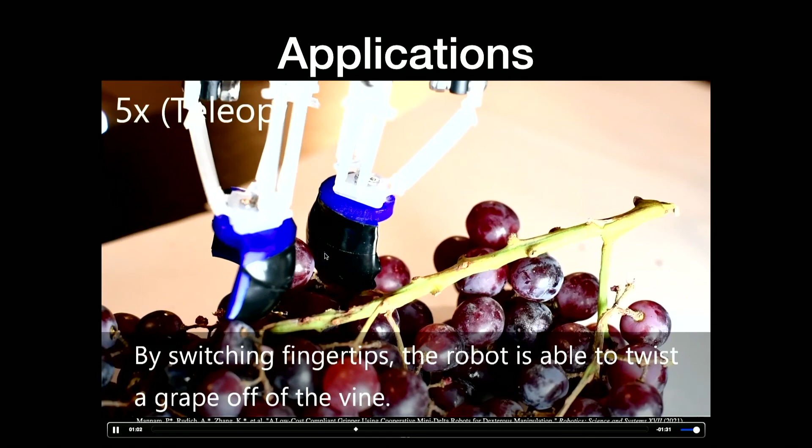One of the harder tasks was taking a grape off a vine—you can't pick it up straight, you have to twist it at the end. We can also change the fingertips on these deltas just by screwing and putting on a new one. Most of these were teleoperated, of course, but here's an example of rolling dough.

This is five times at teleop. I might try to speed it up. Okay, here we go.

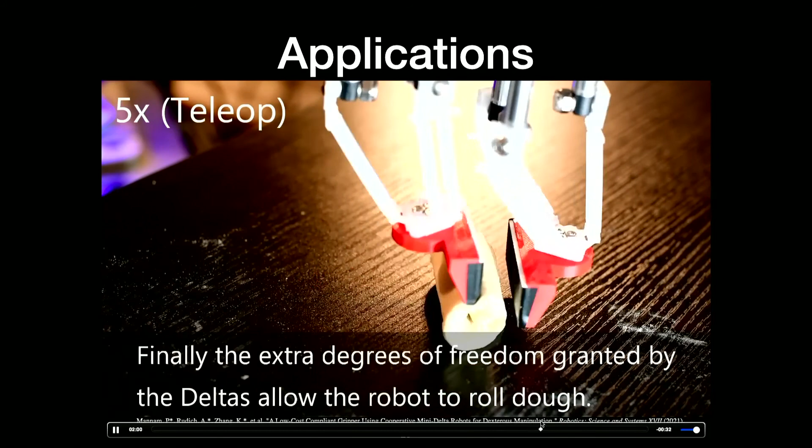But the TPUs are softer, so they tend to bounce back faster than the polypropylene one. The polypropylene ones can exert more force, which is why they were used more in the demos. Okay, thank you.

Okay, thanks for the very nice presentation. I have, I don't know, maybe a too general question, but I wonder, you're using here two Delta robots to do like two fingers, and I wonder which is the advantage of using such a complex structure compared to just two human-like fingers, more usual human-like fingers, maybe soft as well.

I see. The goal of the project was so that we could develop it to have a bigger array of 64, so we could do in-hand manipulations. I think there are people working on training human-like hands to rotate Rubik's cubes and do all that stuff, but I think those hands are prohibitively costly right now, minimum maybe 15,000 to 25,000 depending. I think you could do it with those hands as well, but learning those skills might be more difficult. Delta robots' inverse kinematics have been solved for years, so they can try and map it, and we also have people working on planning so we can do in-hand rotations. But right now, I think it's the cost and the difficulty in training.

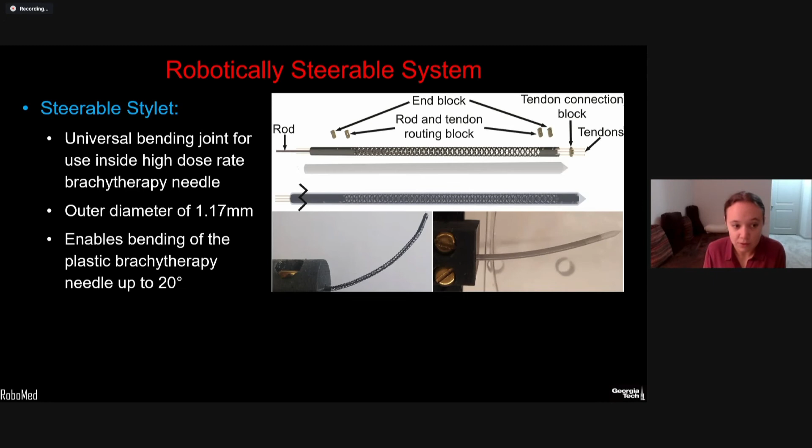In our work, we have proposed a tendon-driven steerable stylet for use in currently available commercial brachytherapy needles. This tendon-driven stylet consists of a nitinol joint cut out of a nitinol tube and a support rod in the center, which prevents compression of the joint, given that the hollow needles are actually rather stiff comparatively. It can be inserted into a commercially available hollow needle for brachytherapy and is able to bend these hollow needles up to the desired 20 degrees in any direction.

We also created a theoretical model for this joint, and we first modeled what we called the stylet only, which is the joint and the supporting rod. We modeled this by approximating the joint as a spring and approximating the rod as a cantilever beam, assuming that the moment created by the tendon force was equal to the moment required to bend the rod plus the moment required to bend the joint.

This allowed us to derive a relationship between the tendon pulling force and the bending angle. We then used this to get a combined Young's modulus and area moment of inertia of the stylet, which we were able to use to get a relationship between the bending angle and the tendon force for the stylet within the needle, given by the bottom expression here.

One key factor we found that affected this force was the moment arm, which was the distance between the tendon and the neutral bending axis. This for us was not always aligned with the central axis. We found that as the joint bent and compressed, it moved the rod to the outer edge of the bending joint, and thus the neutral axis shifted away from the tendon, increasing our moment arm and thus decreasing the force necessary to bend the system.

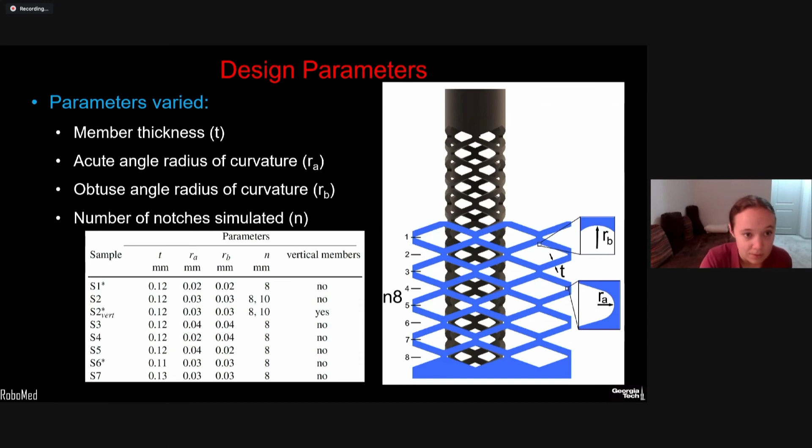The results of these simulations show, as predictable, the joint with the largest radii of curvature and the thinnest members experience the lowest maximum stress. The joint sample in the middle with the same radii of curvature but thicker members, as compared to the one above it, experienced a much higher maximum stress. We also tested some designs with vertical members in a helix in order to increase joint stiffness, and this was also shown to have a high maximum value of stress.

We tested a lot of samples, but to summarize our key findings, the finite element analysis simulations allowed us to compare maximum stress, maximum strain, tendon force, joint compression, and bending angle. We found that the obtuse radius of curvature of the diamond cut didn't really have an effect on joint performance, but we also found that both the acute radius of curvature and the member thickness had a significant impact on the maximum stress and tendon force necessary to bend to the desired angle.

We found that our assumption that the results of the finite element analysis simulation could be scaled up to a full-length joint held for the joint samples without the vertical members, but not for the joint samples with these vertical members. We also found that the sample with the lowest member thickness and the largest radii of curvature had the lowest maximum stress and strain.

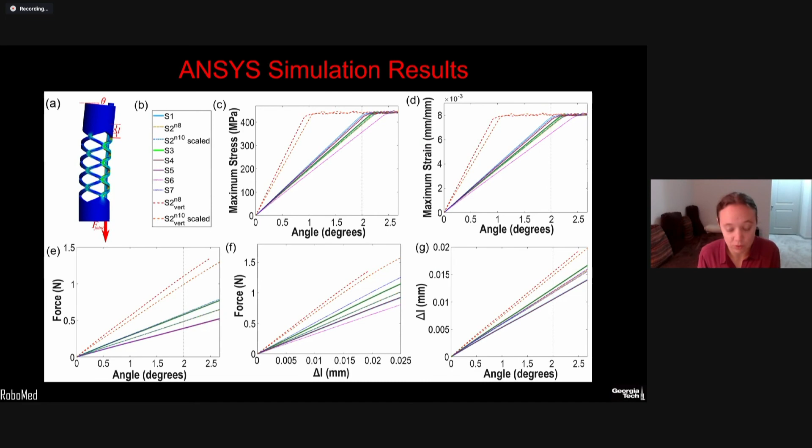In order to validate these theoretical results, we performed some experiments by cutting 3 of the joint samples seen previously. We tested these joint samples both as the stylet only and as the stylet with the needle. In order to test these, we bent and unbent at a constant rate while collecting the tendon pulling force via a load cell and the bending angle via an electromagnetic tracker at the tip of the stylet or the needle.

The results of our experimental tests show that our experimental results fit our theoretical model very well, both for the case of the stylet only and for the case of the stylet within the needle. This was tested for 2 samples without the vertical members, and both of them held very well.

We also saw that the hollow needle contributes significantly to the stiffness of the overall system as compared to the stylet alone. This is partially due to the fact that the stylet is within the hollow needle, so the moment arm of the tendon is so small, and thus the area moment of inertia of the hollow needle is relatively large. Therefore, it takes a much larger tendon force to bend the stylet within the hollow needle as compared to without the hollow needle.

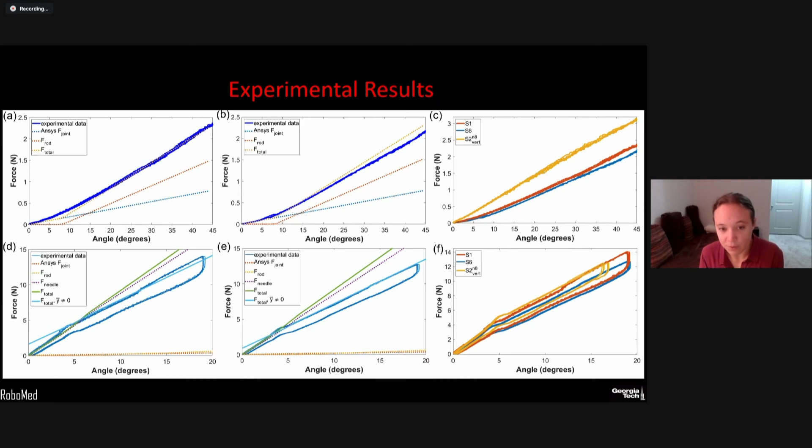Finally, we saw that the trend continued as seen in the ANSYS simulation. So again, here we see that experimentally, the joint sample with the thinnest members and largest radii of curvature also required the lowest tendon force in order to bend to the target angle.

In conclusion, we have proposed a tendon-driven steerable stylet, which is capable of universal bending within a commercially available hollow brachytherapy needle and has been validated to bend this needle up to the target 20-degree angle. Furthermore, we have shown that the parameters can be tuned via ANSYS simulation and that our theoretical model holds.

In the future, we will work to characterize the external forces that could affect the system design and performance, and we will also evaluate the steering of the needle in vivo. I would like to acknowledge Emory University and the National Science Foundation for funding, and can take any questions now.